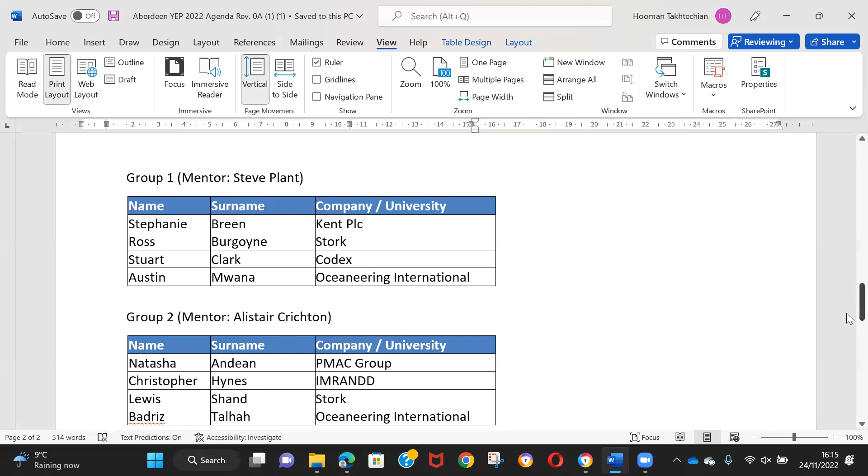Group 4. Okay, so very shortly we will ask Group 1 to stay so that they can kick off their presentation. Just very briefly, I was giving Rebecca a few more minutes.

So the judges tonight are Sue Cushnigan, who is the Maintenance and Integrity Manager at Shell UK in Aberdeen. And we have Chris here, who is with BP, also an integrity lead - senior advisor for corrosion, in Sunbury.

And Rebecca, she's not here yet, but if she does turn up, which I guess is going to be a bit awkward if she doesn't see the first presentation. Should we propose Steve Kane in case? Steve, if you're happy to do that. Wait 2 more minutes, we can - does anybody know where she is? Does anybody contact her? No, I know guys, she might be 2 minutes away, but she also might be an hour away. Yeah, try - have you got the number?

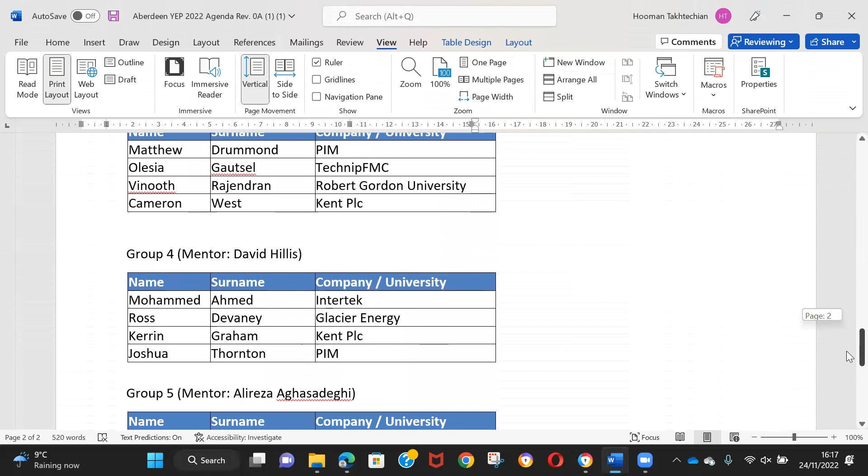Okay, any more clarifications? Everyone happy, knows what they're doing? So it's - was it 1, 3, 5, 6, 2, and 4? Yeah, that's the sequence. You were keeping a track. Oh no, so it was 1, 3 - 1, 3, 5, 6, 2, 4. Yeah.

Thank you, Stephen. Like all good corrosion engineers, you're double hatting tonight. So, in which case, I think if we can therefore ask everyone - Group 1, and obviously mentors are welcome to stay if they want to, up to you. So we don't want - and then at the end, let's just go through. Okay, we can read here.

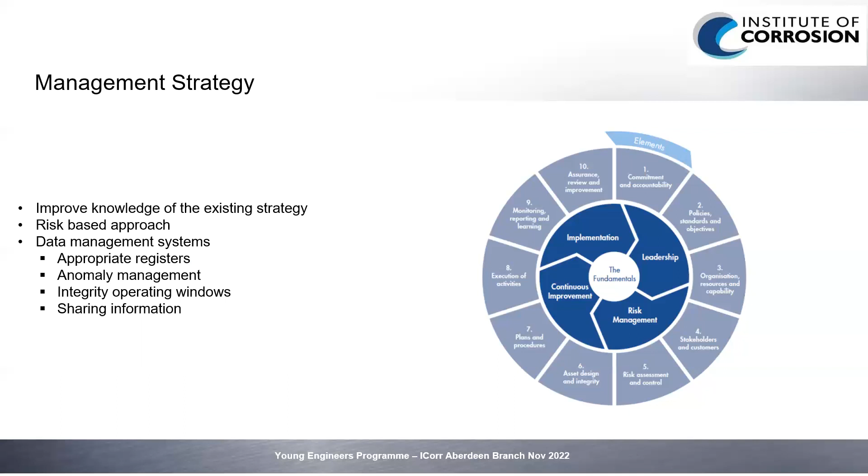The data management systems can also collate when the IOWs are being breached. This not only highlights when they're being breached, but also helps a feedback loop to prevent these breaches in the future. The data management systems aid visualization and data sharing, and this helps decision-making and discussions, not only within the corrosion or IM team, but also with the asset and business management, which will be key in the initial phase of new ownership.

As well as the wider strategy, we wanted to establish if there were any specific corrosion risks on the asset. We reviewed the data to establish different internal and external degradation mechanisms and the probabilities of these occurring. For the consequence, we looked into the impact in terms of safety, production, and the environment. We used this approach for each of the line items on the Excel sheet that was provided. And the results gave the risks, as you can see plotted on the matrix.

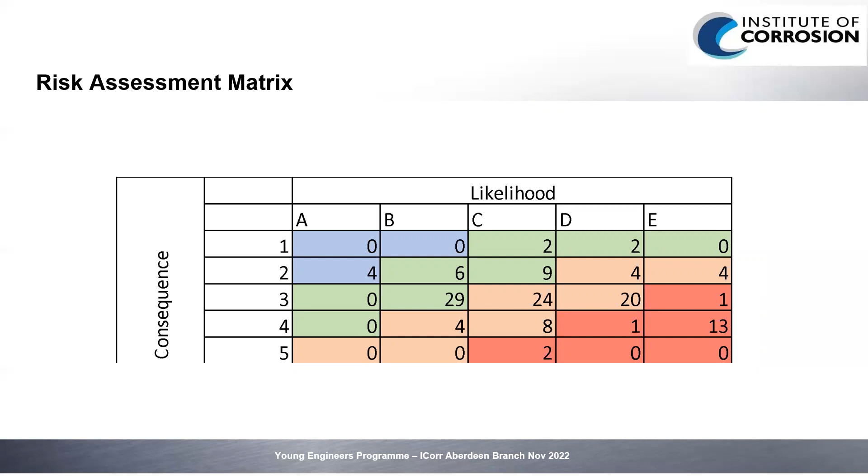There are quite a lot of risks in the bottom right-hand corner. However, there were conservative assumptions taken. Therefore, with additional data, we would expect most, if not all of these, to move within a more tolerable region of the matrix. From the risk assessment, there were 4 key corrosion threats noted in the high and extreme areas of the matrix, with CUI being approximately 50% of these. However, as I mentioned, there were conservative assumptions taken, and this included us assuming there was insulation in place, even when it was an unknown.

As you're aware, CUI management is a significant challenge, with a great deal of time, effort, and money spent across many industries. We would look to work with our process colleagues to establish where there's insulation, what condition it's in, and if there's any insulation that isn't required. We would also look to work with the inspection contractor to ensure the most appropriate techniques are being used during the offshore surveys. Through our processes, our aim is to improve safety, reliability, and efficiencies across our plant, not only the existing plant, but also the new equipment and pipeline for the new field, which I'll pass on to Stuart to discuss further.

Right, thanks very much, Steph.

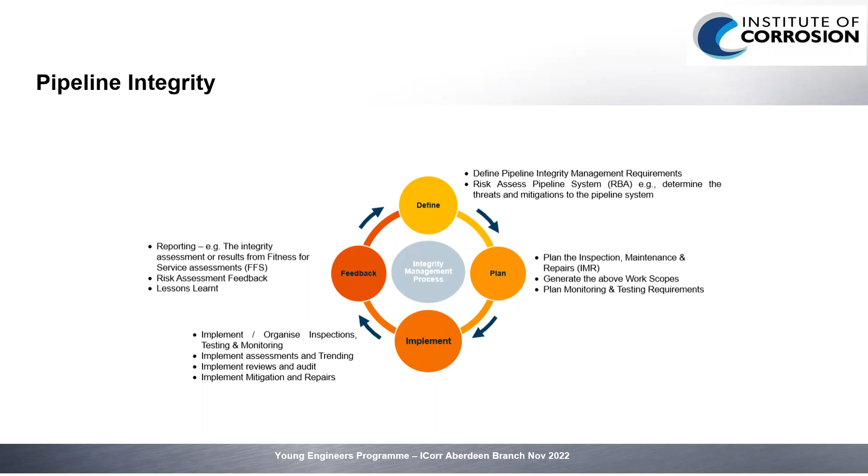So the new reservoir, it's a gas condensate reservoir. We think it's definitely economic to go after. You've got an opportunity there to increase your gas production by about 50%. So quite a considerable increase from where we are currently. We have 100 million cubic feet the platform produces. With a new reservoir, we have an opportunity for 50 million cubic feet extra. Like I say, the reservoir is 10 kilometers away, and studies have suggested that an 8-inch pipeline is going to be the best way to deal with this.

So the main challenges with this new pipeline is, like I say, it's a sour reservoir. So we've got 50 ppm, with our operating pressure, it puts us into the sour service area. So that's going to increase our risk of all the hydrogen damage mechanisms. So hydrogen cracking, stress-oriented hydrogen cracking, sulfide stress cracking, hydrogen embrittlement, blistering, all of that. And because of the local and aggressive nature of some of these, we could end up with a loss of containment, which obviously we have to avoid at all costs, really.

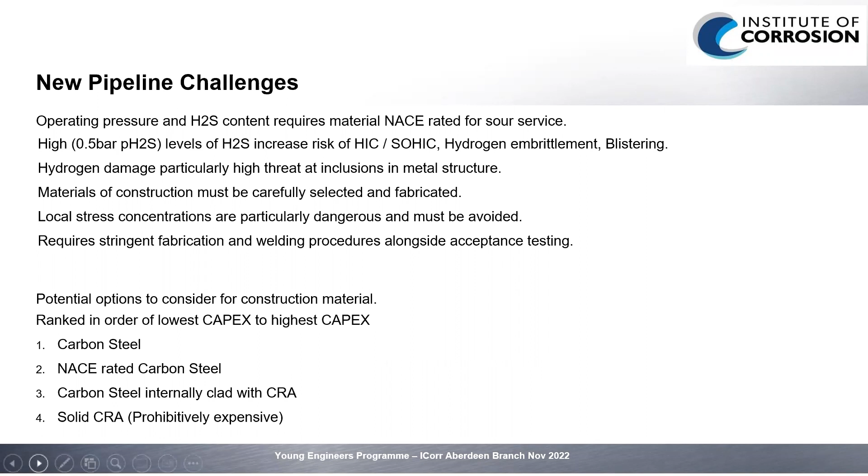And then due to the new field, which is sour, which contains acid gas, your H2S and your CO2, we have done some risk assessment and looked at ways in which this new fluid being tied back into the platform is going to affect or cause any asset degradation. So possible corrosion or integrity risks are your sulfide stress corrosion cracking, hydrogen-induced cracking, top-of-the-line corrosion due to it being a condensate gas. And we basically want to manage this properly to avoid any asset degradation and also to meet export conditions of the export pipeline. So these are some of the risks we've evaluated and we'll try to manage if we work with you guys,

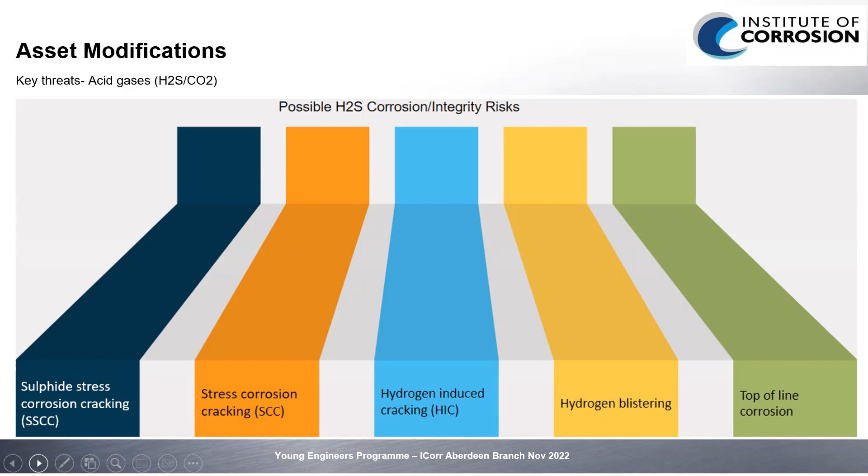the contractor. So we'll move on to the major challenge for us in the sour fluid, which is the H2S, and we'll try to remove this, as I said, to meet export conditions and to avoid any integrity issues of some of this H2S mixing with water and affecting our flow lines or our equipment. So we'll try to remove this, and the process of removing it is gas sweetening.

And we evaluated different factors to come up with the two best methods to remove this H2S or acid gases. So we looked at the H2S concentration, OPEX, CAPEX requirement, because I'm sure it's important to the contractor and operator. We looked at other defined specifications of operating conditions, and we came up with two methods to sweeten our gas: the regenerative one, the amine contactor tower, and also the non-regenerative one, whereby we directly inject our triazine into the flow lines or pipeline. So I'll move on to the next slide where I give you brief descriptions of the two and which is more feasible.

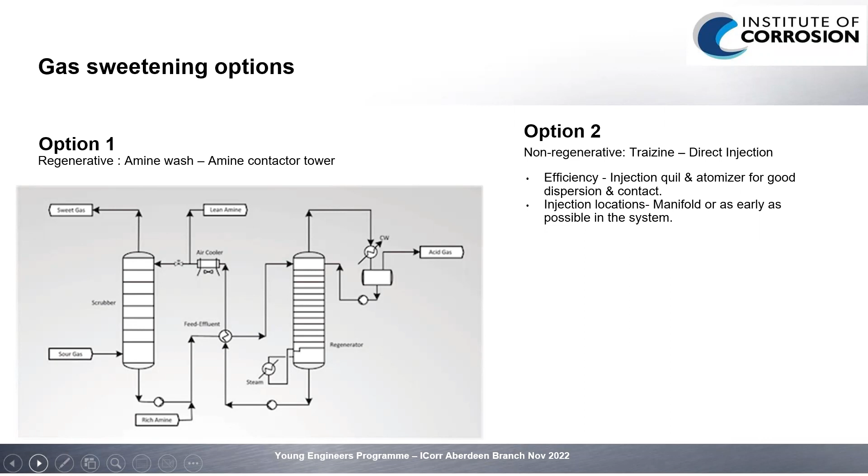The second method basically is the direct injection, whereby you inject your triazine and it removes your H2S or your acid gases from the fluid stream. And for efficiency's sake, we also have an injection quill and atomizer for good contact and making sure that they mix with the fluid. We also look at communication with the chemical company to look at possible locations where we could inject this, could possibly be in the subsea manifold or other areas where we feel might be more effective to sweeten our gas and thereby remove the effect of it damaging equipment or flow lines.

So these are also the advantages and disadvantages, and we looked at, as I said, CapEx and OpEx. They all have their pros and cons and try to fit the operator needs, the client, the contractor needs, and so on. And the main takeaway from this is the contactor tower has a low OpEx because our amine is regenerative, and the CapEx is a lot because you need those massive contactor towers and so on. For the direct injection method, it has a lower CapEx because you just need your pumps and so on. And then it has a high OpEx because you need loads of your triazine because they're not regenerative. So when they are spent, you need to put in new ones. So these are the advantages and disadvantages. Due to time constraints, we can't go into much detail.

And then we also looked at the economics, which I'm sure is important to the contractor and also the client. And from initial assessments, which if we're working with you guys, we'll also look at ways to get a detailed view of, this is just an illustrative view to give you guys an idea of the two processes. And from the look of it, the triazine direct injection method is cheaper compared to the contactor tower one. It's 3 million yearly compared to 4 million yearly. These are just illustrative views, but we'll go into more detail when we have more details and more chemical compositions of the fluid and so on. So that's it for this slide.

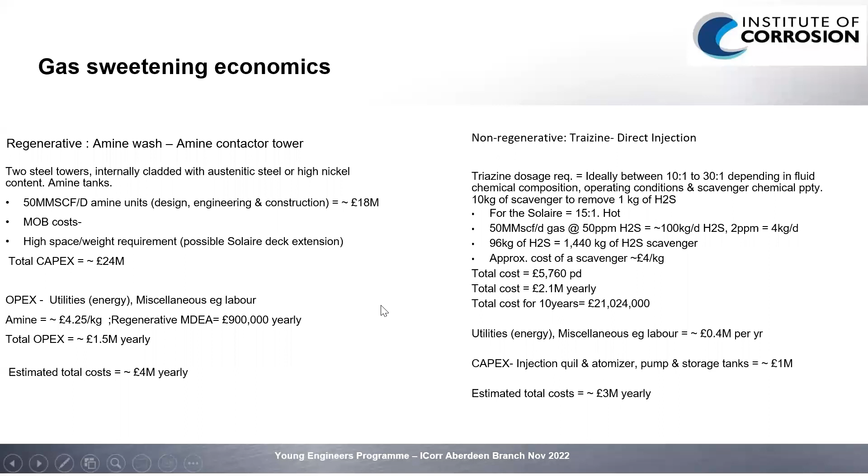To summarize from asset modifications, we recommend the triazine injection method as the best option for the Solaire platform, being an existing facility. Having contactor towers on the Solaire platform brings up issues like space constraints and budget constraints. So we feel the triazine direct injection method will be best for this platform.

Going forward, due to our risk assessment and risk analysis, we also try to ensure material selection, making sure it's NACE rated to NACE MR0175, so there's no asset degradation and all flow lines and equipment are good to go. We also look at fitness for service assessment to make sure they last up to the estimated asset life of 2032 or more, depending on client needs.

We will incorporate all of this operationally, with a systematic approach to IOWs. We will develop strategy management documents for management of change, risk registers, and so on, and make sure we've evaluated where chemical injections have not been optimal, ensuring they are adequate and sufficient.

Due to the condensate gas, we also see there might be hydrate formation, so there may be a need for hydrate inhibitors. These are the strategies we propose, and hopefully when we work with you we'll dive more into detail. I'll pass on to my colleague who will conclude on our deliverable.

Something else we would like to do is look at meeting our net zero goals. You've got four examples there. I'll go into more detail in the next slide.

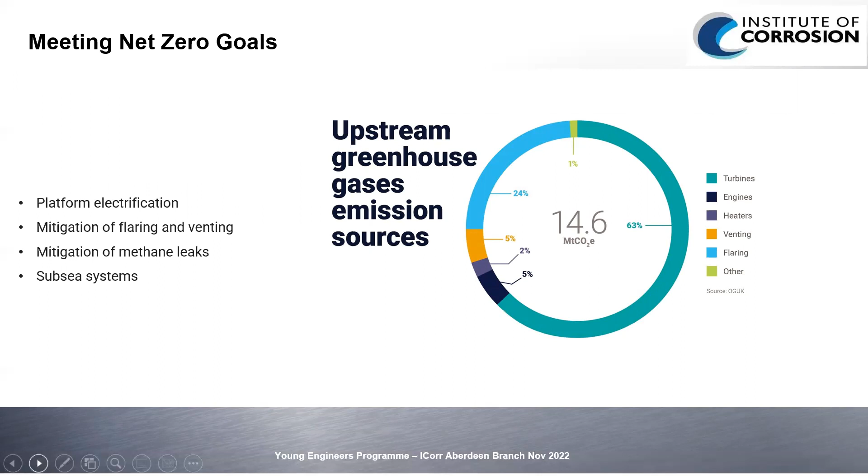To conclude where we are with our proposal, we start with a full initial risk-based inspection just to clear up any assumptions, then integrate this with data management software, which would help relieve any potential risk from change. We would implement these with operational windows, allowing us to work our assets better and more optimally, which leads on to our net zero goal.

With net zero, by having a more efficient plant we will reduce our leaks, including methane leaks, which helps our footprint, but also with fewer inspections we'll be more efficient in that regard. So there'll be a smaller logistical footprint, again helping meet our net zero goal, trying to meet the industry's commitment of 50% by 2030.

Regarding the new field, what we would look to do is a direct injection, using NACE-rated carbon steel in the production of the pipe. But what we'd like to do, if we win the contract, is work with the design contractor to do a full economic study of this before we make our final decision.

Thank you for listening. That is us, and if you have any questions, we'd be happy to answer them.

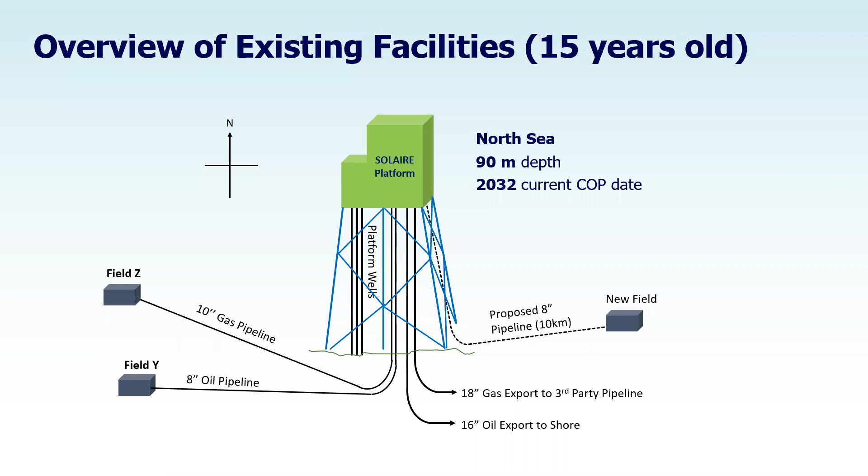So this presentation is about the Solaire platform. The Solaire platform is currently 15 years old. As you can see in the presentation here, you have 2 fields, field Z and field Y. Field Z comes in on a 10-inch gas pipeline, and field Y comes in on an 8-inch oil pipeline. They both run at a depth of 90 meters. And on the export pipelines, you've got the 18-inch gas line and the 16-inch oil line. There's also an opportunity to tie in a new field to this platform.

So the agenda for this presentation: we're going to go through our risk assessment and what we found from that. We're then going to go through our corrosion management program, so our mitigation controls and corrosion controls to manage those risks. And then we'll go through our material selection and our tiebacks, so how we intend to tie in the new fields to the current platform.

So first off, on our risk assessment, we risk assessed all of the pressurized systems within the Solaire platform. This consisted of 108 lines in total.

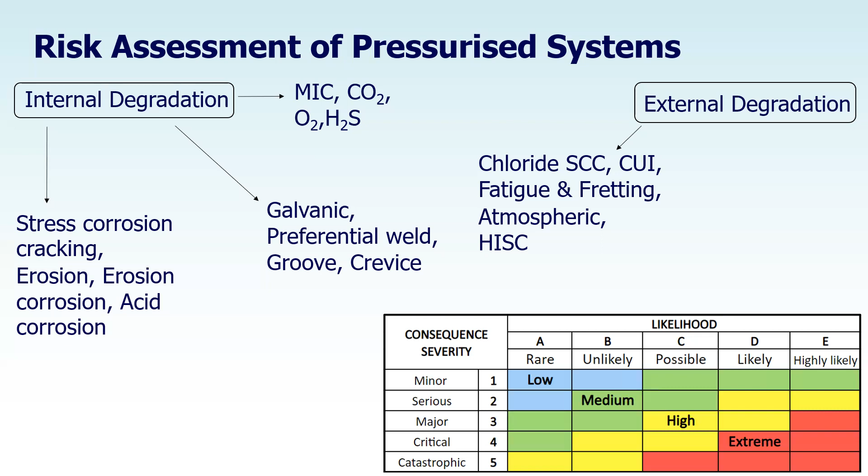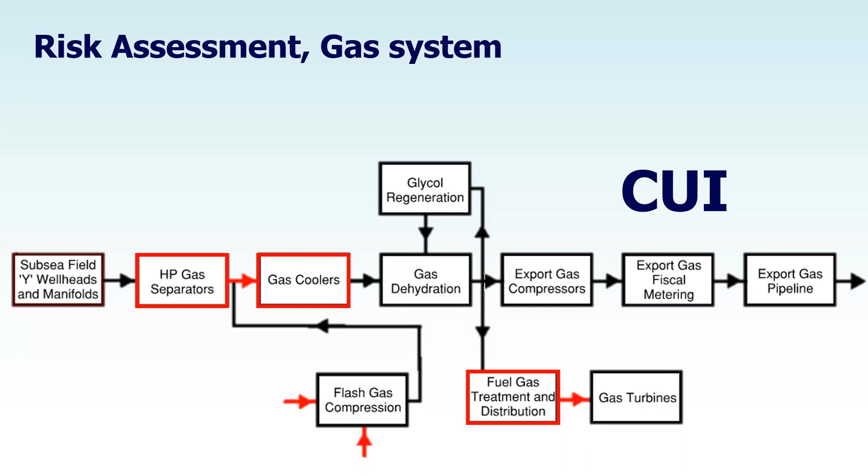Moving on, we have the CUI at these points. Again, you'll see it's only extreme risk that we found here, no high risks.

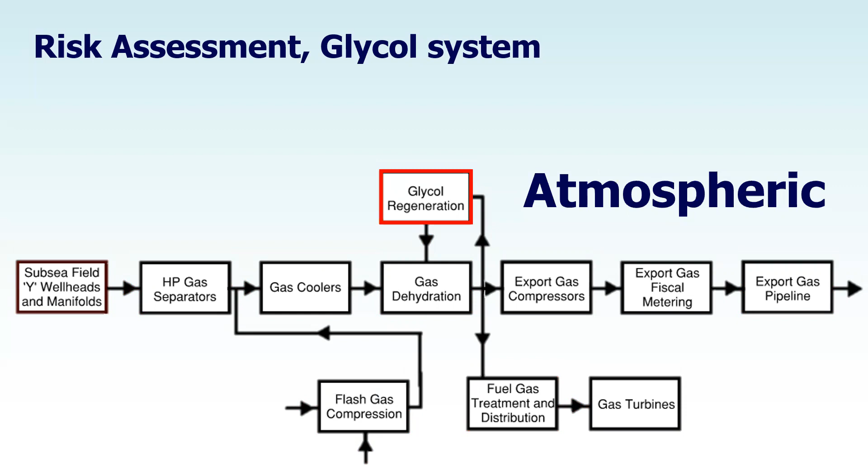Moving on now to the glycol system. We have crevice, CUI, and atmospheric corrosion all prevalent, and there's extreme risk in the glycol regen system. You'll find more detail about that again in the risk assessment in front of you.

Next, we move on to the oil system, so the multi-phase system. You see here, we've got MIC, which is prevalent throughout the entirety of the platform. This is the worst case corrosion within for the whole platform.

We have the export oil pipeline requiring particular attention as it has a history of MIC and other corrosion mechanisms. We also expect to include a dead leg campaign for this particular corrosion type.

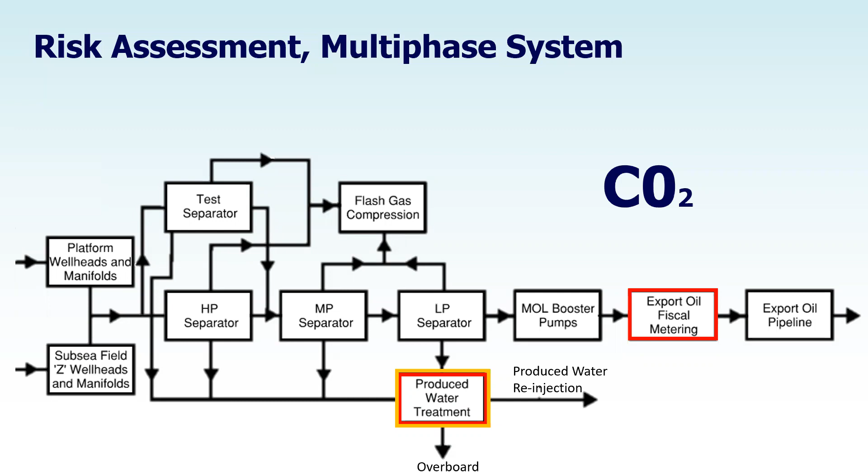Moving on again within the oil system, you have CO2 corrosion at these points. Preferential weld corrosion at these points, yellow boxes again denoting that it's high corrosion, red box is extreme, and in the produced water treatment with other slides again, you've got high and extreme risks both within those sections.

You have erosion here for again the oil system, and erosion corrosion at similar points as a result of that erosion.

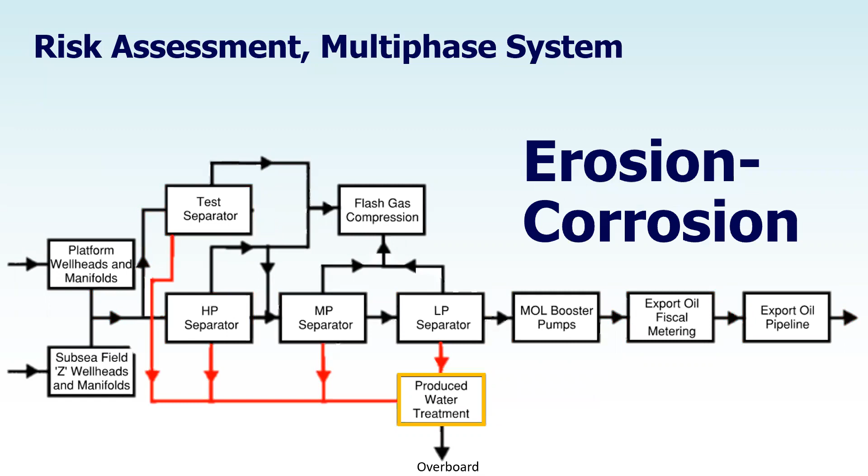This doesn't look that bad, but actually when we went through the risk assessment, we found there were a number of unknowns on the platform, and these would be required to be assessed immediately. Vinuth will cover this in further detail later in the presentation.

Lastly, for the oil system, we have atmospheric corrosion at these points.

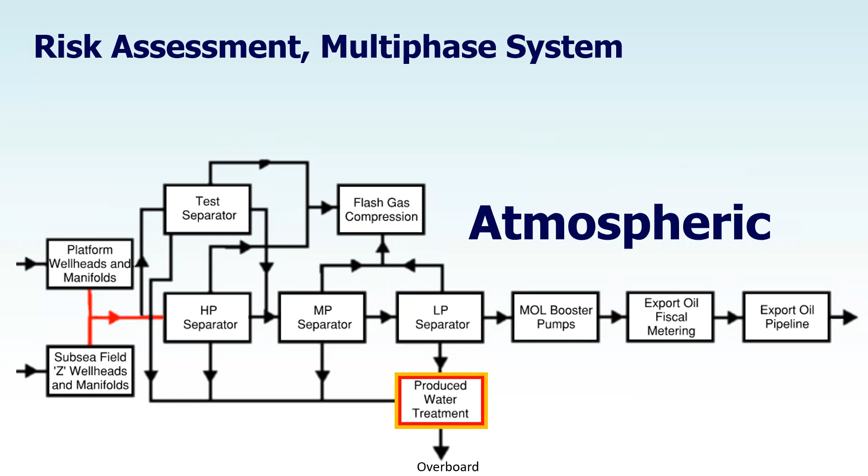Finally, for the risk assessment, we have the miscellaneous systems. These are ones that just we couldn't fit onto the block diagram. We have contaminated water disposal, heating medium, relief systems, all with varying different corrosion mechanisms, and all again for the high and extreme risks only.

So that concludes the risk assessment side of things. I'm now going to hand you over to my colleague Vinuth, who's going to cover the mitigation and corrosion control measures for those risks.

We have made a systematic investigation to identify the potential threats to the offshore platform facility. We identified around 10 corrosion types having high and extreme risk, and 5 corrosion types currently present in the facility. So we made a special strategy for each corrosion type to mitigate and control based on its risk level.

The first one is MIC. Applying biocides will kill the bacteria and mitigate the microbial activities. MIC corrosion is controlled through increasing the pigging frequency and MIC treatment with a different combination of biocides. If we use a single biocide, the bacteria will get immune and it will stay longer.

So PWC and CO2 corrosions are mitigated and controlled with a selection of suitable material with resistance and applying an inhibitor, and maintaining the inhibitor availability.

H2S and oxygen corrosions are mitigated with applying H2S scavengers and oxygen scavengers and controlling the flow rate respectively. Erosion is mitigated by doing sand flushing periodically and selection of suitable material with high resistance.

Galvanic corrosion is mitigated by applying an inhibitor, or otherwise we can separate the two different materials with separating layers such as rubber sheets or a coating.

Crevice corrosion is mitigated where possible by doing the welding and avoiding bolt joints.

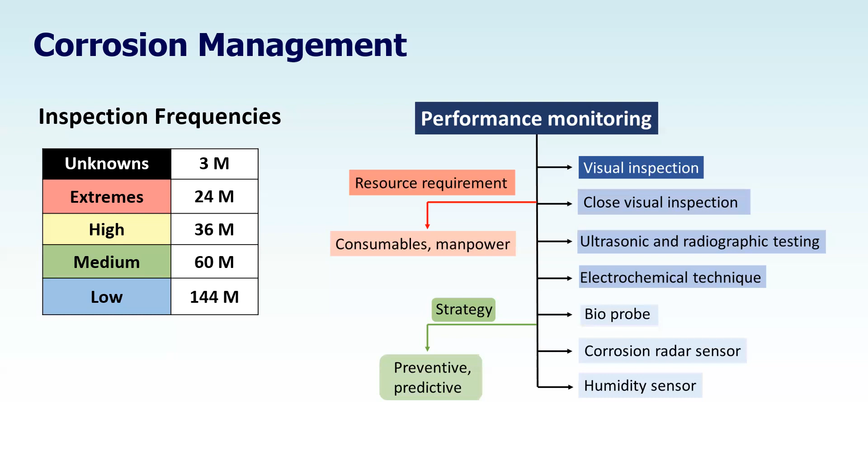As part of the purchase of existing facilities, there is also an opportunity to develop another gas condensate reservoir 10 kilometers from the platform. I'd like to start with a brief introduction of the data we used as input to material selection for the new pipeline.

Two steps have been taken to select the appropriate material. First is corrosion assessment, and second is cost estimate. For the purposes of this presentation, we will only focus on CO2 and H2S corrosion.

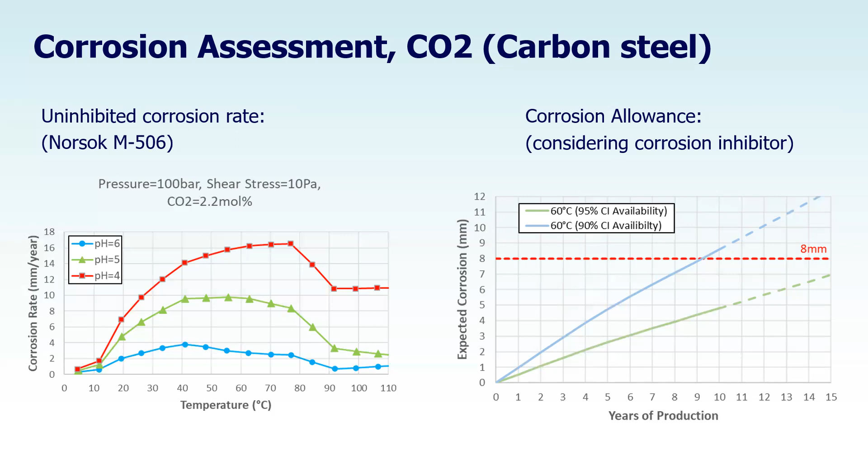That was the corrosion assessment of different material options for the new pipeline. Now I'm going to hand over to Cameron, who will provide more details on material selection and modifications of existing facilities. Cameron. Thank you, Lucia.

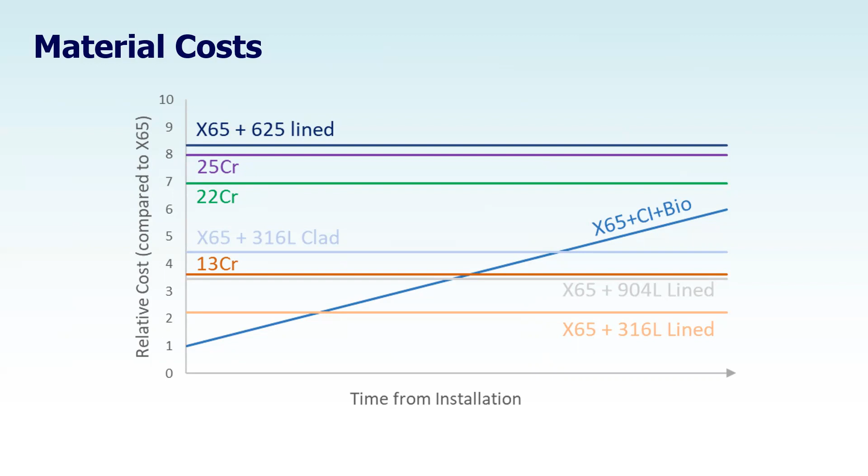Once we've chosen our pipe material, we need to make considerations for welding consumables. In general, the requirement is that we want the mechanical properties to match that of the base material, whilst having a higher yield strength. Specific considerations need to be made for the presence of H2S, as per ISO 15156, to limit or control hardness and nickel content.

Once we've selected an appropriate welding consumable, we'll need to test and qualify that it's compatible with the pipe material. To do so, we do the standard weld procedure qualification trials, including standard mechanical and chemical testing. Further to this, we may be required to do additional hardness, hydrogen-induced cracking, and stress corrosion cracking testing. Further to this, the production welds will be tested with at least 100% UT or radiography.

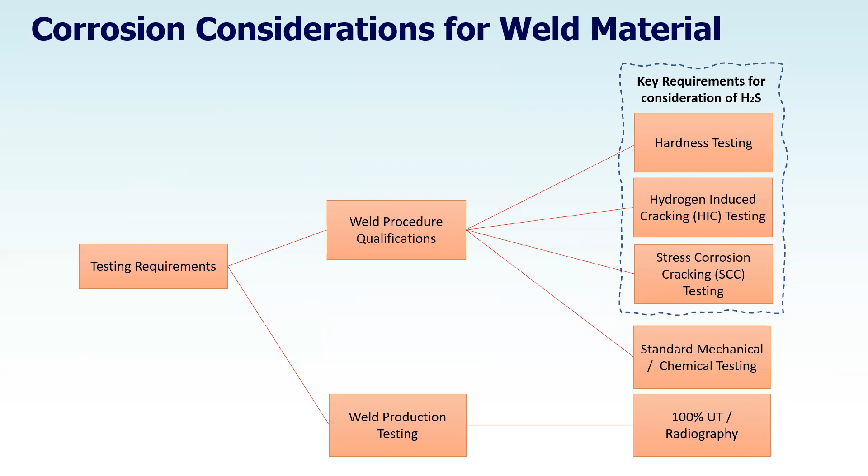Finally, further investigation we've completed in order to assess the tieback opportunity is to assess the compatibility of the fluids coming in from the slightly sour field to the existing facilities on the Solera platform. In doing so, we've determined that there are a number of vessels and components on the platform which are incompatible with the new fluid, specifically including stainless steel clad 316L vessels and components.

Thank you very much, and I'm going to pass back to Matthew to conclude. Thank you, Cameron. So just to summarize, in our presentation we have shown you the high and extreme risks of the Solera platform currently.

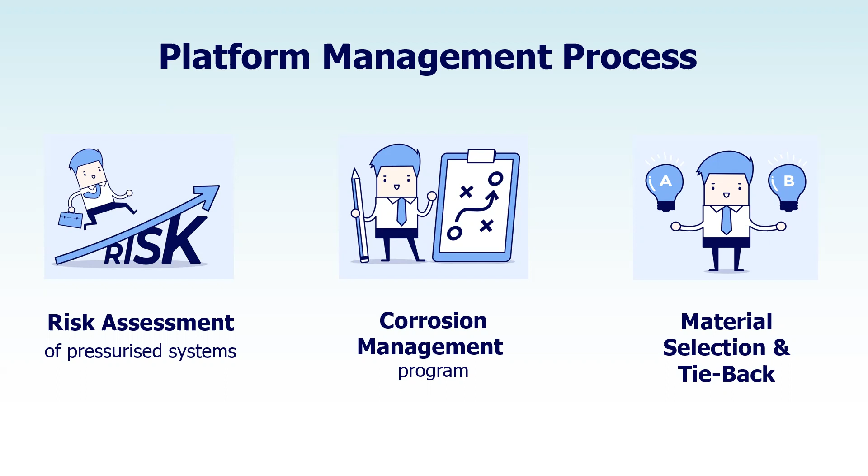Yeah, that's good news. You didn't conclude, so maybe I missed it, but you didn't mention which material you preferred for the pipeline. Yeah, we don't really want to insist on one material because it's always up to the operator to decide, but we show that carbon steel is an okay option, and normally people prefer to go for it. So it really depends on the strategy. If you don't want to invest a lot of money prior to the project, maybe go for carbon steel. If you want to consider overall cost, then other options may come into play.

And if we'd selected carbon steel, you mentioned some online monitoring there, but did you consider any sort of pigging activities we might have to do on that line? Regarding pigging, Cameron, do you want to add something? Yeah, I suppose we'd come from the design assumption that given it's a subsea tieback, regular inspection or clean pigging would be inappropriate, very, very high cost. Yeah, but would we need to do it, do you think, on a carbon steel line? Yes, we would need to do that. Okay. Something to look into, whichever option we select. Okay. Thank you.

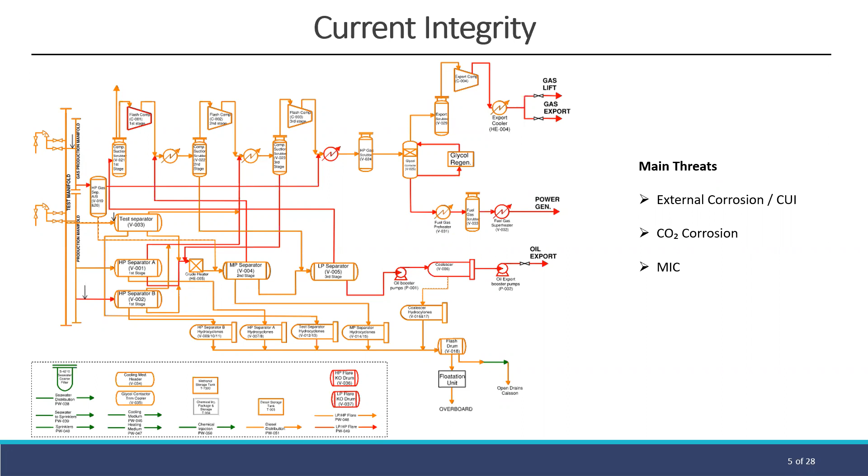The main threats are shown on the right-hand side of the screen. And as you can see here, we've got a lot of orange and red risk. This is primarily due to the known failures and anomalies, the harshness of the North Sea environment, and additionally an applied level of conservatism, which has inflated the risk overall.

So starting with the outside in, our main external threat is corrosion under insulation. 25% of the items on the platform are unknown whether they are insulated or not. We recommend doing a line walk to get the insulation status reported and the condition of these unknown items.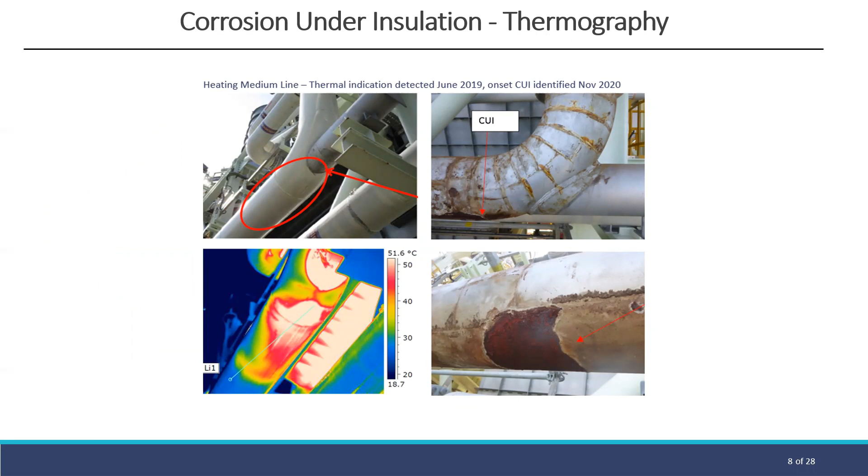So we have high and medium risk items due this year for insulation removal. So what we recommend is thermography as a CUI screening tool initially to detect water ingress and help prioritize insulation removal. Here's a real life example of a success story where thermography is being used, with a thermal image shown on the bottom there. And then a year later, when insulation was removed, CUI was detected.

So, internal risks. CO2 corrosion has been noted on both oil and gas systems. Both oil and gas pipelines are inhibited. However, there's been note of failure and downtime of the gas inhibitor pump, which has had significant downtime thus far and has reduced inhibition of this stream. We recommend inhibition of the separators to ensure carryover throughout the rest of the stream. Additionally, a review of the inhibitor to ensure it's water soluble is recommended. The corrosion rates are most prevalent at separation and diminish downstream.

And moving on to the export system, what we recommend is dew point monitoring, and where there are prolonged periods of excursions, potentially insulating these items. Now, I know what you're thinking, mitigating against CO2 and introducing the potential of CUI. However, this would be managed through the CUI strategy.

Next, we have MIC. This is prevalent in primary separation, produced water, and the oil export streams. Raw seawater has been used to flush the separators, which is an accelerated route of introducing bacteria within the system. So we recommend treating this seawater before flushing, or even better, utilizing thermography to detect solids within the separators and only flushing with treated seawater when absolutely necessary. We recommend a biocide kill dose followed up by routine biociding and sampling to ensure effectiveness.

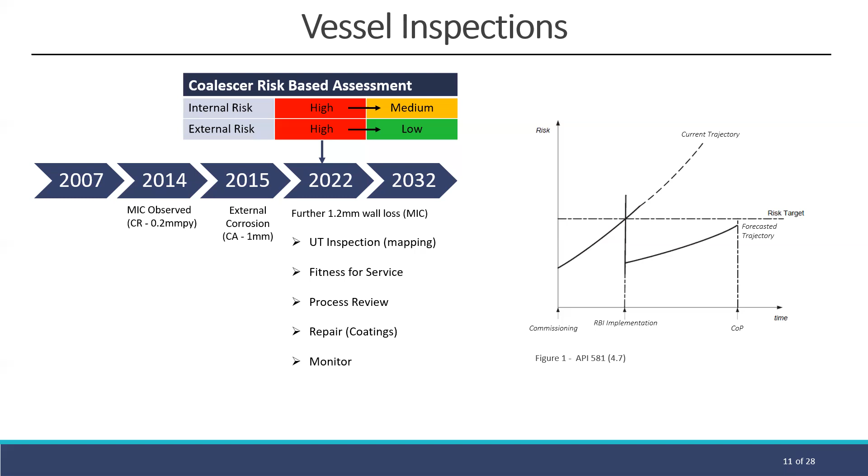So the written scheme of examination looks something like UT mapping to gain the remaining wall thickness, a fitness for service assessment, potentially a process review looking to downrate this vessel to allow repairs focusing on external first, and then an intrusive inspection to repair the glass flake lining when the shutdown permits. And then we would monitor this throughout life.

As Rosie mentioned earlier, we've noted MIC and microbial activity upstream, so we suspect they're MIC, especially as we know corrosion inhibition has been good in life for this pipeline. So the first thing we'd recommend is doing a more detailed defect assessment on these to tell you how far you can actually operate to with wall thickness.

The main thing we're noting right now is that it's probably very unlikely this pipeline will be able to operate all the way to 2032 based on its wall thickness. So our immediate mitigations would be implementing a monthly pigging regime, reducing the water content from 2% right now to ideally 0.5%, but 1% may be more manageable, and also introducing biocide into the oil export system.

What we'd recommend doing is a temporary bypass utilizing a hot tap. This will allow us to replace that 2-kilometer section with vessel intervention, allowing us to maintain export around the bypass line while doing the replacement, reducing the impact on shutdown. This also has the good impact of reducing the cleaning and pigging requirements prior to the replacement, reducing the impact on the onshore and offshore facilities.

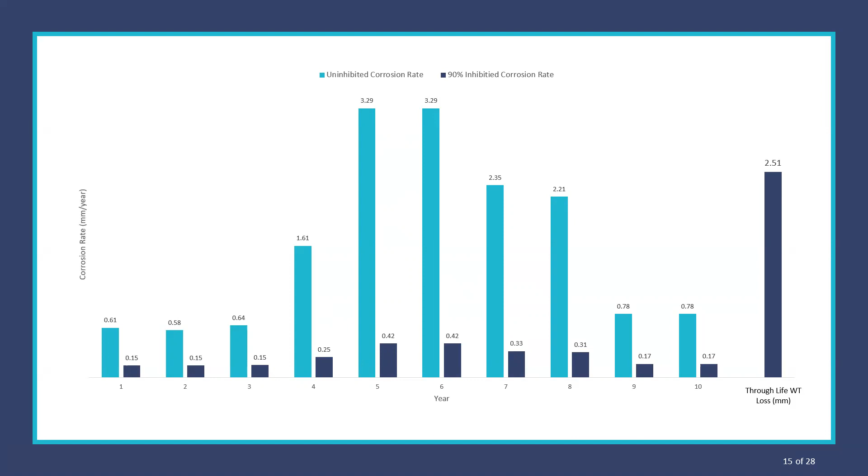Next I'll talk you through our approach to the new subsea tieback design. We were asked here to look at material selection, welding consumables, and also corrosion mitigation. So we performed quite a conservative corrosion assessment, and what we found is we can reduce the through-life wall thickness loss to 2.5 millimeters using inhibitor, telling us that carbon steel is the feasible material, and that's what we're going to use.

Looking a bit further into the material grade selection, we're in ISO 15156 region 1, which allows us to choose a very high number of carbon steel grades. We've chosen API 5L X65 due to the lower wall thickness requirements and the cheaper material requirements later on. We verified this with wall thickness calculations.

We're also choosing a CRA spool at the inlet. This will help allow for corrosion inhibitor mixing and also reduce the worst-case corrosion rates at the inlet. Because we've got high temperature, high chlorides, and some H2S, we can't choose things like 316L. We did think about looking at a solid duplex, however, requirements for external corrosion protection and cathodic protection meant we decided not to do that because of the cracking risk. So we've chosen Inconel 625 because the spool is only going to be of short length.

For welding consumables, we've been to specific manufacturers and suppliers, and we picked out two consumables we think would be perfect, both carbon steel and Inconel 625, if welding is required.

Looking at mitigation of the internal corrosion, again we've proven inhibitors feasible, so we'd choose that for internal corrosion mitigation. We would have that CRA spool at the inlet, and we'd also install an umbilical to allow for further chemical injection as required through life, for things like biocides and scavengers as needed.

For external corrosion, we've done cathodic protection calculations to DNV and ISO standards. What this told us is we need 34 aluminium bracelet anodes on the whole pipeline to protect for corrosion through life. We've also chosen 3LPP coating because it's got very good coating breakdown factors and is widely used in the North Sea, and we've chosen 2.8 millimeters of thickness based on ISO standards.

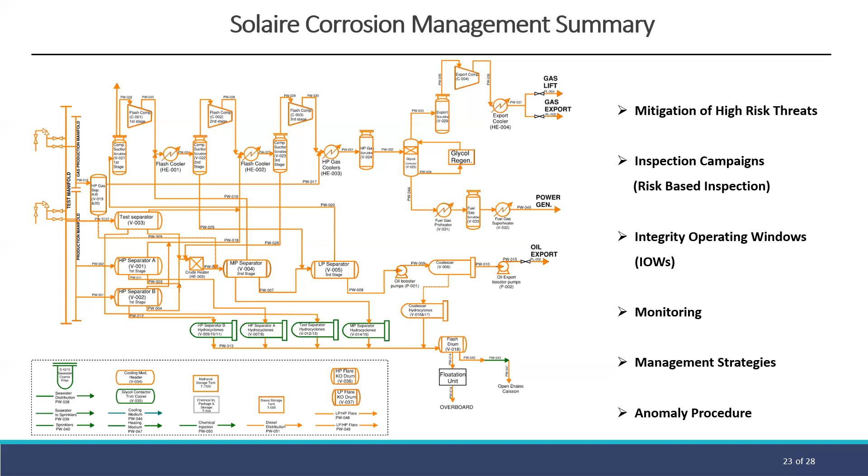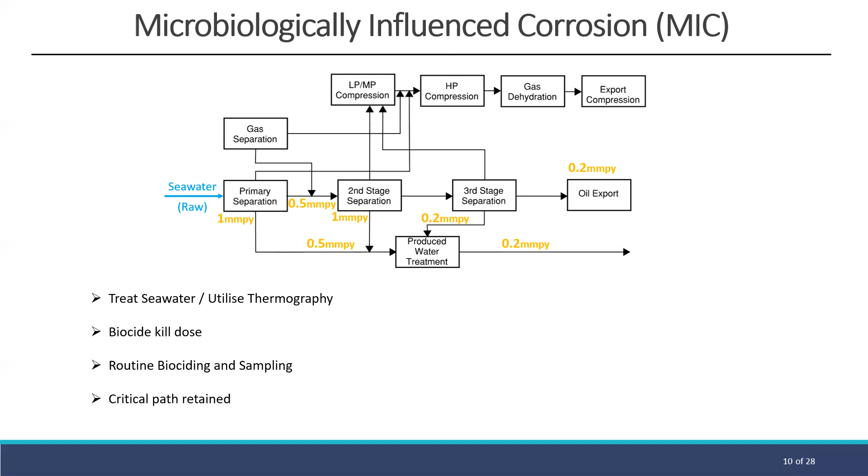But part of the reason we inputted the ABEX accrual into our cost model is we wanted to build up almost like a fund, with decommissioning in mind, but not being closed-minded to that - building up a fund that can be used for alternative options, i.e. carbon capture options. But yeah, that's definitely something that can be looked at. The model was based on expecting the revenue to drop with reduction in production, but also expecting the operational costs to remain very similar throughout the life cycle.

As technology advances, efficiencies advance, and the operator becomes more efficient within the sector - we've been quite conservative with the operating costs, we've gone on the high side knowing the client is new to the asset. We're not expecting them to be like an established operator with a lot of synergies that can really get their cost per barrel down. So we've been very conservative, and I think there's definitely scope that this could go beyond the year 10 life cycle.

We started off with the scope of work provided by Bala Integrity by creating a PFD based on the process conditions given. Here we've highlighted all the anomaly observations provided by the contractor, and we can see several anomalies across all different utilities. We then put this into a table to categorise it into different sections, giving a starting point for our risk assessment.

So Shravan will take you through the risk assessment that we've done as a group.

Thanks, Aileen. So after developing our diagram, we have done a qualitative risk assessment for all the equipment. Here is the matrix — based on our qualitative risk assessment, we've classified equipment into 4 different classes: low, medium, high, and extreme. For that, we need the likelihood and consequence severity.

For the likelihood, what we've done is based on our anomaly information, categorizing it from rare to highly likely. If there's no information available, we use the material and the fluid going through it, along with the temperature and conditions, whether there's a coating or insulation or not, and based on our experience and literature, we determine whether the likelihood is rare or highly likely.

Regarding the consequence of failure, we have chosen failure consequence based on safety — personnel working near the equipment — and otherwise any disruption of production, which leads to cost and environmental impact. What we've done is take a more conservative approach: if the consequence of failure is higher for a particular classification, we use the higher one.

So based on that, for example, if the consequence of severity is 4 and the likelihood is D, then it comes under the extreme condition. If that is the case, it has to be attended to straightforward — either the likelihood has to be reduced, or the consequence of severity, and ideally both.

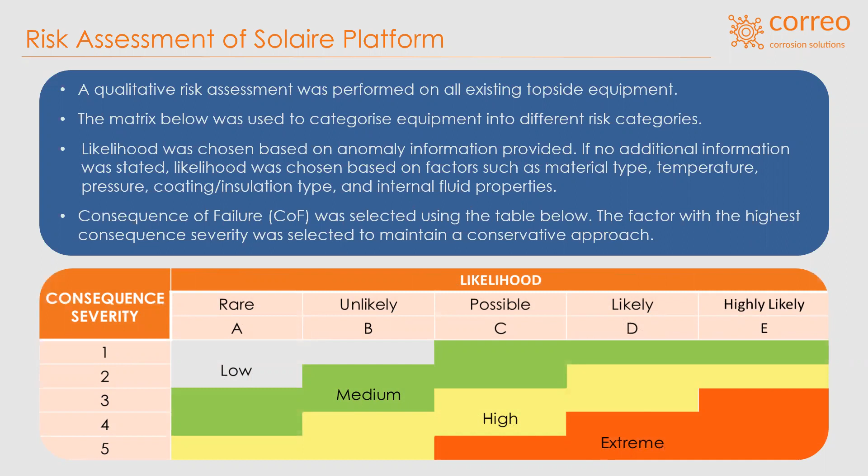What we've observed is that over 80% of the topside facilities are in the extreme and high category, which is not acceptable. And this is based on the current inspection techniques currently being performed.

So what are the shortcomings? They use time-based inspection, which is not right when you are looking into an extreme facility versus a low facility, wasting a lot of time and spending cost in low-risk category equipment. We also observed poor administration of the inspection database, and a lack of inspection for much of the equipment.

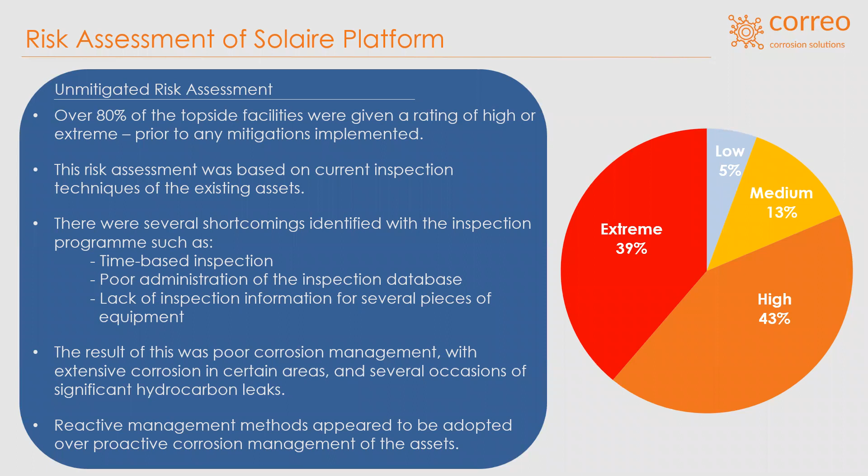The result of this is poor corrosion management, more corrosion in certain areas, and significant leaks in the hydrocarbons. There's a reactive management method in place, and we are looking into more proactive corrosion management of the assets. With this, I'll forward to Aileen, who will go through the corrosion management things.

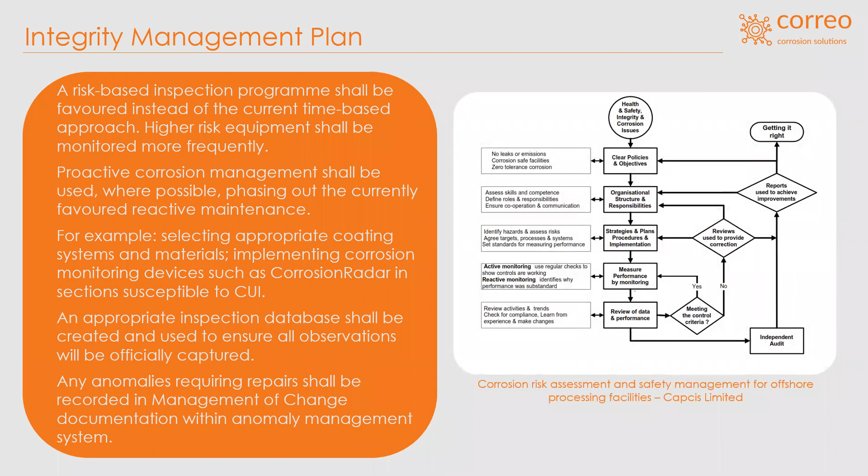So again, this is just to show that we are following the HSE loop here, the diagram, which I've explained in a more simplified way previously.

Going back to the example of the produced water system in place, this is again the unmitigated risks here. As you can see from the mitigations we are suggesting, such as inhibitor injection, ultrasonic testing, inspection and maintenance of the coating systems with corrosion probes and microbial sampling, we have then decreased the likelihood of...

...these events occurring. As you can see, we haven't actually decreased the severity of any of these, as nothing has particularly changed, such as materials or anything, but more so with the inspection techniques we are choosing at a more frequent rate, our likelihood should hopefully decrease, bringing them into lower categories.

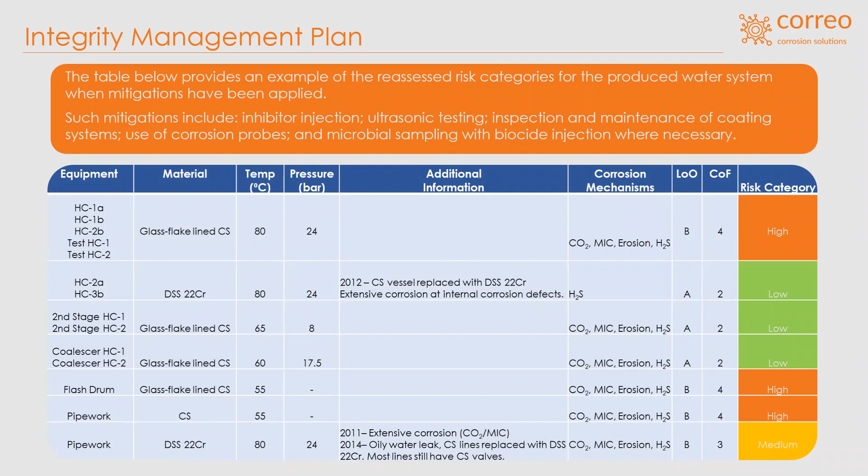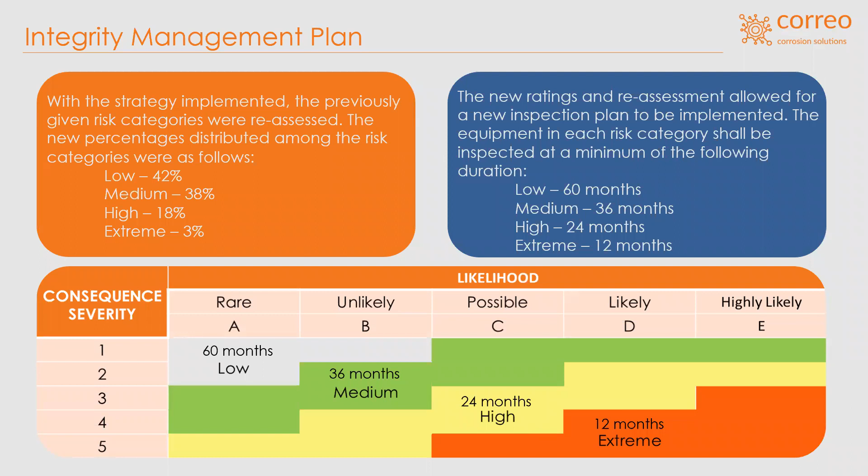So as part of the scope given to us by BALA Integrity, we were also given this new gas condensate subsea tieback. We've produced a diagram here for illustrative purposes only, so we can see our new gas condensate line, our existing infrastructure, as well as our export from the Solaire platform. We were given the data that there would be 50 parts per million H2S, as well as 2.2% CO2 content. With this, we calculated partial pressures of 1.225 and 539 kilopascals of H2S and CO2 respectively, based on the design pressure of 245 bar.

When we add these together using ISO 15156, we came up with a pH of 3.7, which landed us in sour region 2, meaning this would be medium sour, and we would then have to assess this for our material selection. The partial pressure ratio of CO2 to H2S was 440 to 1, which meant that it was in the mixed corrosion regime, but predominantly CO2.

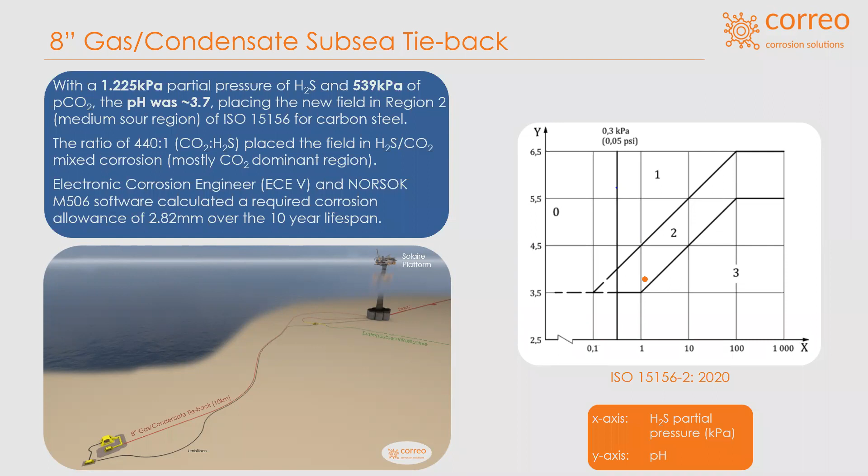We also calculated an inhibited rate using NORSOK M001 to give us a corrosion allowance of 1.18. Because we had a relatively low corrosion allowance, we could select a seamless X65 carbon steel sour grade material for our line pipe. And we had to be wary of the potential corrosion types that we would face, such as CO2, H2S, top of line, bottom of line, microbial induced corrosion, erosion, and preferential weld corrosion.

We've got measures in place to mitigate against these, such as the injection of corrosion inhibitor, scale inhibitor, and MEG to prevent hydrates into the field periodically when required, when we have more information to set up a regime on this. We'll also be making sure that the weld consumables are compatible with the material that we have selected, and ensure that they are also sour grade.

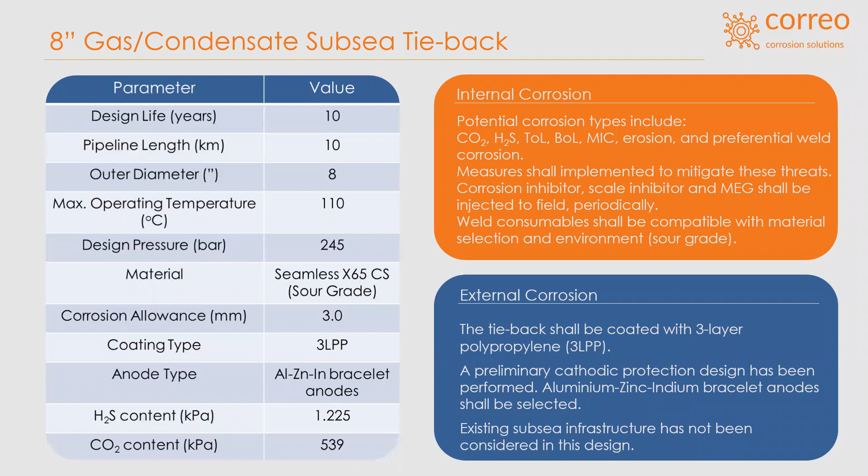Because we are now injecting a slightly sour line into our topside facilities, we had to perform a sour service assessment of the platform facilities, which Craig will take you through now.

So, sour service, obviously the presence of H2S. This is just our original PFD. Here you can see we have the new field inlet and we have the processing there. For sour service, you would expect things along the lines of hydrogen-induced cracking, stress corrosion cracking, acid corrosion, and microbial. With that in mind, this would be similar to CO2.

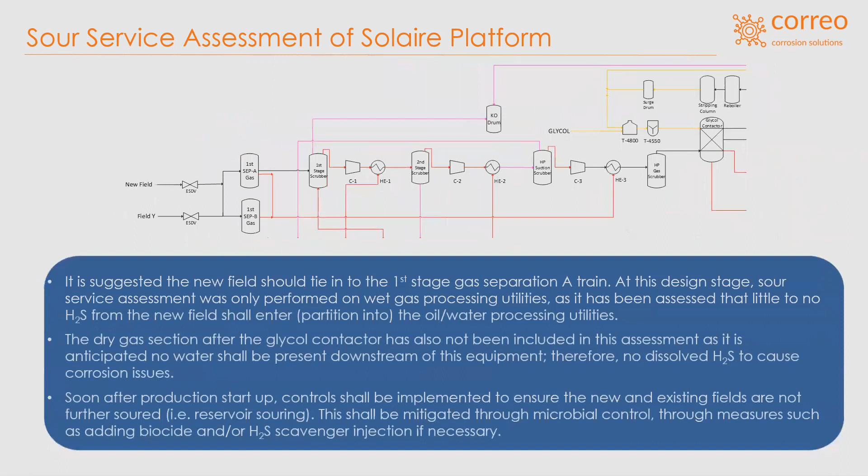For our material selection, we were using NACE MR0175 and ISO 15156 for corrosion resistant grade steels. We'd also have to consider corrosion resistant grade fittings and fixtures, washers and the like.

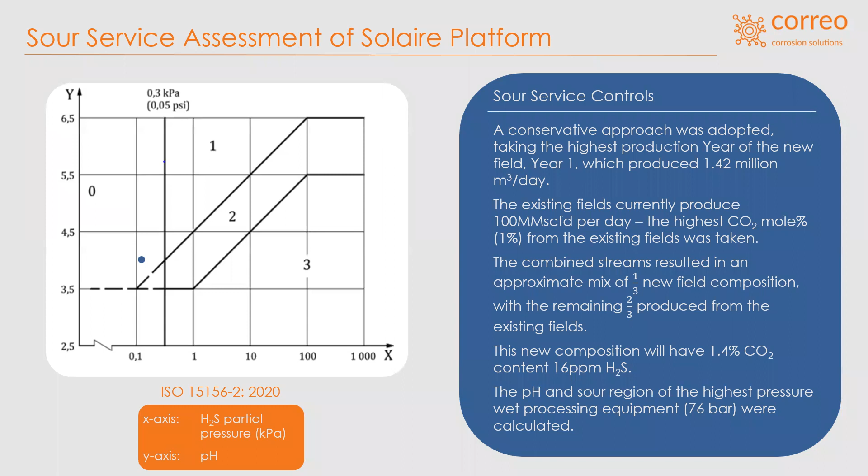So this is our summary. So the unmitigated risk assessment and currently implemented time-based assessment located almost 80% of the equipment in the high and extreme. And after our integrity management plan using a risk-based inspection methodology and being more proactive, corrosion management is adapted rather than reactive methods, and it decreased the risk, high and extreme, from almost 80% to less than 20%.

So for the new tieback, the new field is in sour region 2 based on ISO 15156, and we have a few recommendations here: having a seamless X65 carbon steel sour grade and 3 mm corrosion allowance selected, and we need to have compatible weld consumables. And the coating selected is 3LPP. And regarding the bracelets, aluminum-zinc-indium anodes need to be selected. And corrosion inhibitors and MEG are recommended.

And the assessment regarding the already existing one. So what we have observed is that the commingled gas inlet had a CO2 of 1.4% and H2S of 16 ppm. So the assessment revealed that they are suitable for processing the new field conditions. However, we are capable to do more sour assessment.

And finally, what we would like to say is we are a capable and also passionate and professional team, with a diverse background, and with the sole aim of developing and designing a corrosion management program to decrease the cost and ensure successful running of the plant for the industries. And we look forward to working with you. Thank you.

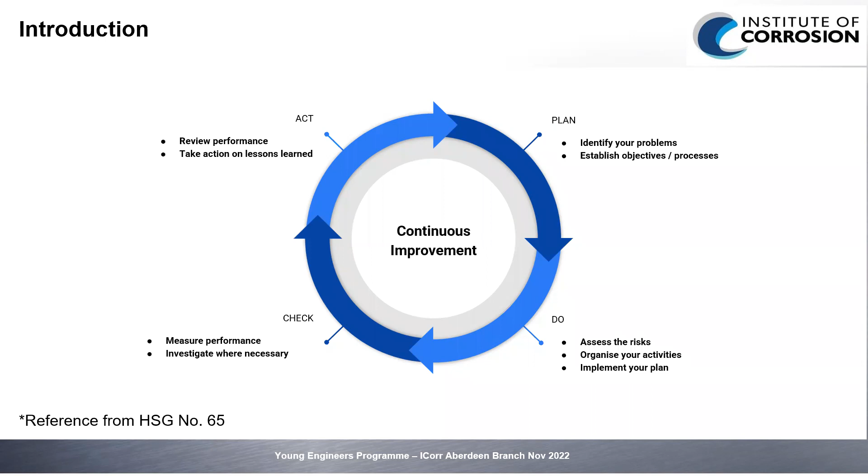Externally, we've got the threats of chloride pitting, stress corrosion cracking, atmospheric corrosion, galvanic corrosion, and CUI, which is a bit of a theme across the asset, which Chris is going to go into more detail on later. So how are we going to manage these threats?

Referring to DNV G101, we've identified inspection activities both internally and externally to start with our inspection plan. Internally, in terms of preferential weld corrosion, we believe installation of continuous UT monitoring probes would help here, along with inspection activities on the hot spots such as UT, RT, phased array, and long range UT.

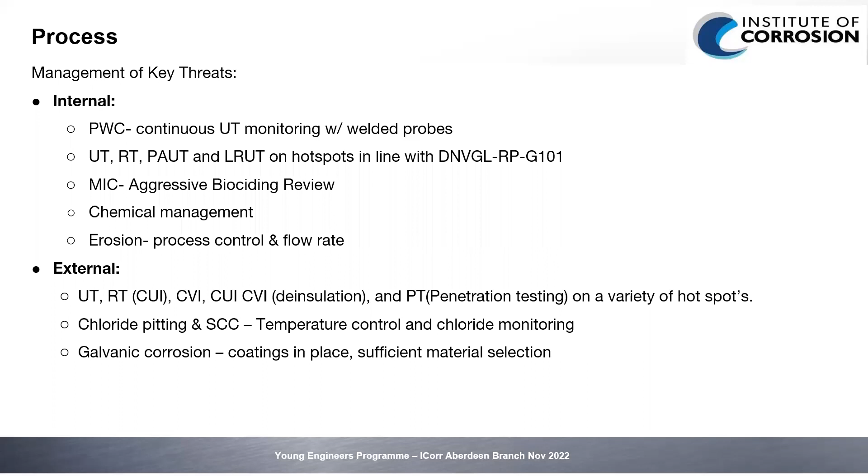And also for the stress corrosion cracking, we believe some chloride monitoring is required. In terms of the galvanic corrosion, we believe inspection of the current coatings in place and to determine if there's sufficient material selection right now.

Moving on to the utilities, our risk assessment has noted approximately 50% of the equipment categorized as high to extreme. Once again, a lack of inspection data has forced us to be more conservative with our RBA. Once additional data has been gathered, this will be updated and reviewed as per the Plan, Do, Check, Act cycle.

In addition, some lower risk equipment could be potential candidates for event-driven inspection once confidence has been gained, which we feel can add real value.

In terms of main threats, internally, we're seeing a continued MIC presence throughout the utility system as well as the process. We've also got the potential for acid corrosion within the glycol system.

There was a glycol leak in 2020. At the time, this was attributed to CUI. Based on the fluid and the rich glycol pipework, acid corrosion is expected. However, inspection data in this area is limited.

We also have the threat of O2 corrosion, most notably in heating and cooling mediums. Once again, this is expected based on the fluid. Again, inspection data has been sparse in this area.

Externally, we're looking at pitting and cracking presence throughout the CRA locations, with several instances where the operating temperature is on or above the pitting and cracking thresholds for these materials.

As previously stated by Lewis, CUI is a massive issue on this asset, which I'm going to cover in just a bit. And finally, a general external threat similar to the process side. So how do we plan to manage these?

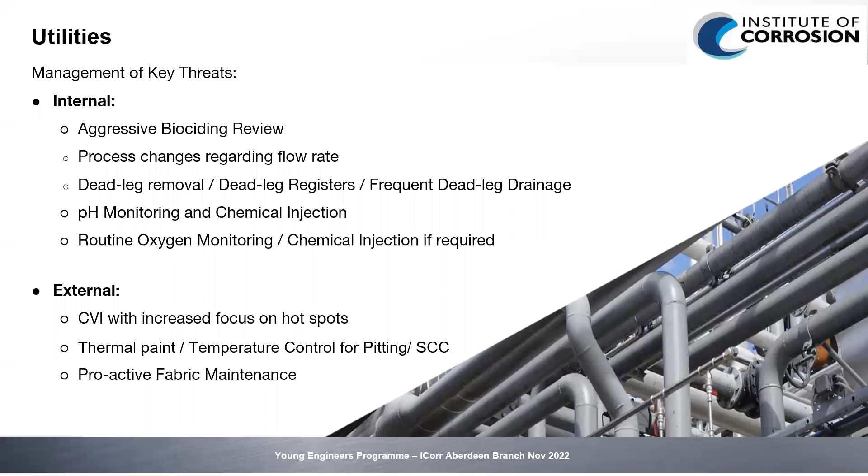If you do not know the status of your insulation, you cannot possibly identify CUI as a threat. This problem is compounded further when you look at it by system.

Again, high risk, but with 40% of your system known as a blind spot. Incidentally, this is also the system where in 2021 there was a 70 kilo gas leak which resulted in the platform shutdown, and CUI was noted as the cause at the time. It's also worth pointing out that the current insulation status of that pipework that failed is unknown.

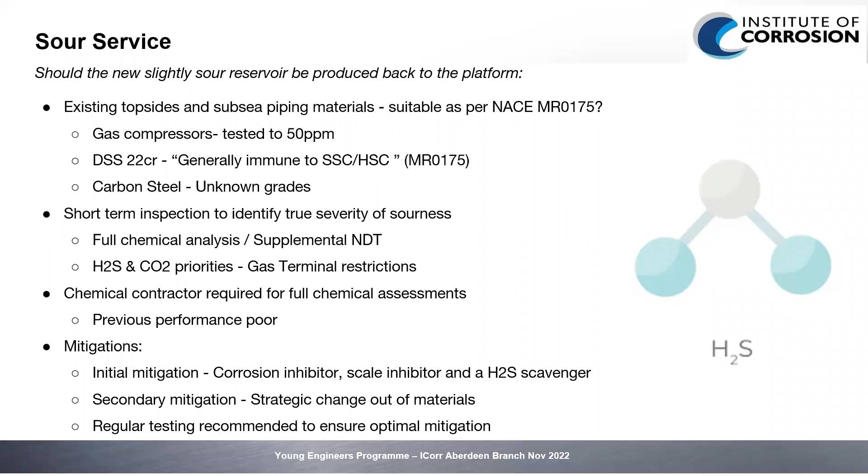So should we tie in the new reservoir? What would we recommend for the pipeline? It's essential we pick the right material, but we also feel low cost would be a key driver for yourselves and your client.

For welding materials we would use carbon steel welds, but these undergoing hardness surveys to understand if they're at the correct hardness levels and are more resilient to the risks. And we recommend low percentage hydrogen consumables are used to prevent introducing further hydrogen into the system.

So the main benefit of these materials is a lower cost, and they are mostly resilient to any of the threats coming in. There are other exceptional materials such as DSS 22CR, but with this being a more expensive price point, we believe carbon steel is the best choice for this.

Hand over to Chris. So one of the steps in carrying out threat assessment is to identify possible damage mechanisms through the RBA process, and this flow diagram further illustrates the credible damage mechanisms identified on the oil system.

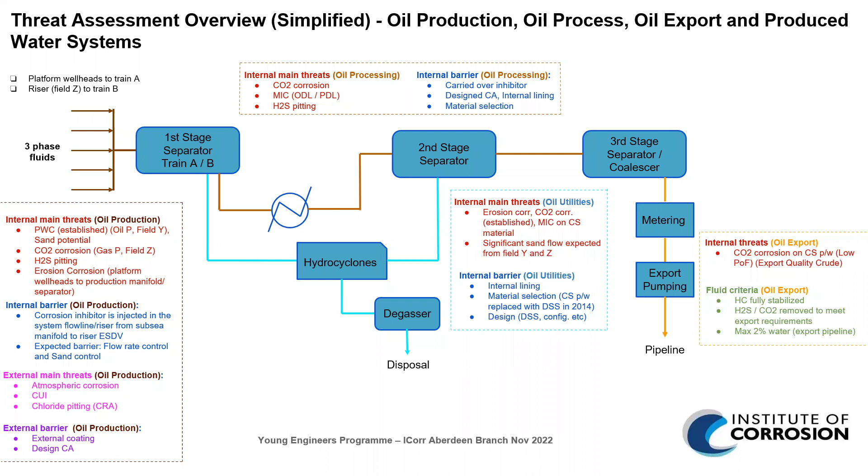Here's another example where we take into account material selection for the produced water system, where almost 80% of the components were constructed either from duplex stainless steel or carbon steel with glass flake.

And here is the top threat identified on the gas system, further to the gas dehydration process, where it is expected to be dry gas before being exported through the pipeline.

And another example where you consider the threats on the glycol system and the operational barriers.

So once we get the task count, then we can estimate the duration using the inspection norms, and then from there we could estimate what the total inspection hours are.

And this is the 12-year look-ahead plan for all the RBI plans established for the facility's medium and low criticality items, where we plan to inspect from the second year onwards.

So all very high and high criticality items are planned to be inspected during the first year using NDE or IVI during turnaround or at the earliest available opportunity, and all the medium and low criticality items from the second year onwards.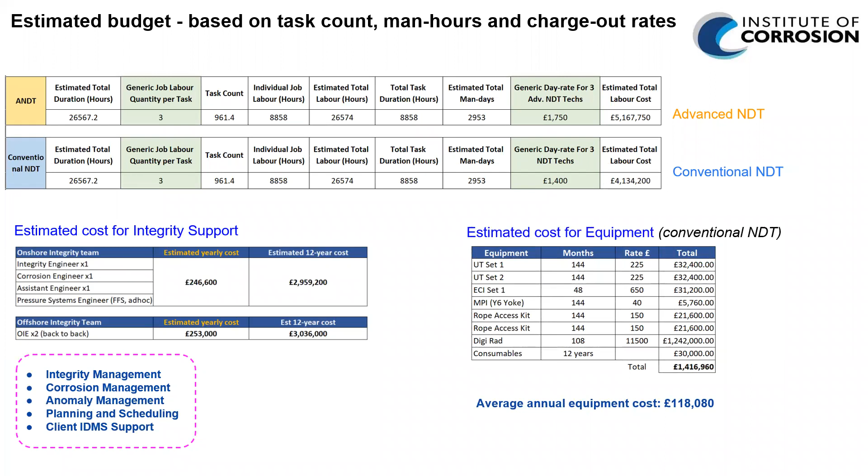So based on the estimated cost on the previous slide, we can now see what the total cost would be like. The annual cost would be somewhere around 966,000 pounds per year, and around 11.6 million pounds for the 12-year period.

If we factor in the 2% inflation rate every year, we would be looking at a cost around 13 million pounds for the 12-year period, averaging about 1.08 million per year.

Please note that RBI is a dynamic process, meaning it could change based on new information received, so this table and estimate should be used as guidelines.

And then we move on to the corrosion control matrices developed for this facility. As an example, this table below represents a snapshot of the master CCM developed by our team. As you can see, the table covers the management of corrosion through chemical, design control, and operational control, and also the target parameters for chemical management.

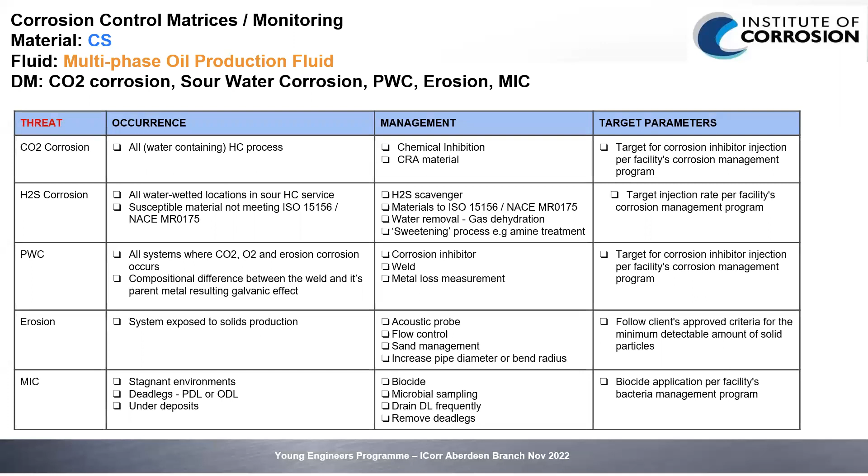And this brings us to the last question, and the most important one: why us? We understand the challenges and issues faced by the upstream oil and gas industry, and our team brings new ideas and measures for your asset. We use a consistent and robust approach, and most importantly, remain compliant.

We're determined to challenge the status quo, while at the same time offering alternatives which are digitally supported and cost effective. With a good integrity plan implemented, not only will we be more efficient, we can eliminate major incidents and reduce the amount of fuels and emissions, which will contribute towards the UK oil and gas net zero targets.

That's why, ladies and gentlemen, we feel we are the best choice for your client's asset integrity and corrosion management provider. Thank you for listening today. Do you have any questions for us?

So hello, I have a question around your selection of carbon steel for the new pipeline. How did you assess that? How did you go about deciding that carbon steel was the right material there?

The main thing we looked at really was NACE MR0175, and we looked at the different options within that which were most resilient, but we really managed the most cost effective approach. We were looking at what could fit in, what was resilient to the threats, and which carbon steel was the best option at that lower cost area.

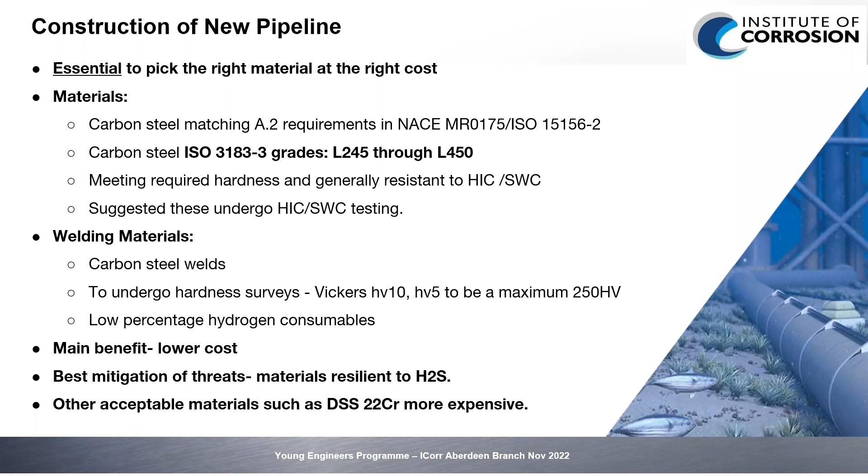On the CUI, you talked about, I think it was 23% of the systems where you didn't know if you had any insulation at all. And then you gave a very detailed 12-year look ahead on inspection, planning, and resources. But I guess you've got a lot of unknowns at the start. So how are you going to adjust that plan with what you don't know yet, and then risk assess what's going to have to shift?

So the first step is fully understanding the CUI, the full extent of the CUI risk. Once we carry out that campaign, which will have a one-off cost, it will have to change. The RBI will be viewed as an iterative process, and then it will get factored in. If there are immediate threats that we find from that one-off campaign, they will have to be managed on a case-by-case basis, whether going through an anomaly system or if they can wait until a stripping campaign can potentially mitigate the long-term issues it may find.

Okay, thank you. And a follow-up: lots of detailed costings on resource, equipment, and planning. But what's your view on, since you talked about deploying lots of barriers at the start, how does barrier deployment and barrier effectiveness have an impact on your long-term inspection plans?

Thank you for the question. I believe the most important thing is to really understand what is the actual condition at the moment. The data given to us, we may need further detail on that. I want to reference a statement from UK HSE, one of the good practice documents, about aging assets. How does UK HSE define an aging asset? It's not about how old the system is, but about how much you know about your system, its condition, and how it changes over time. So we need to first know what the conditions are, and that helps us.

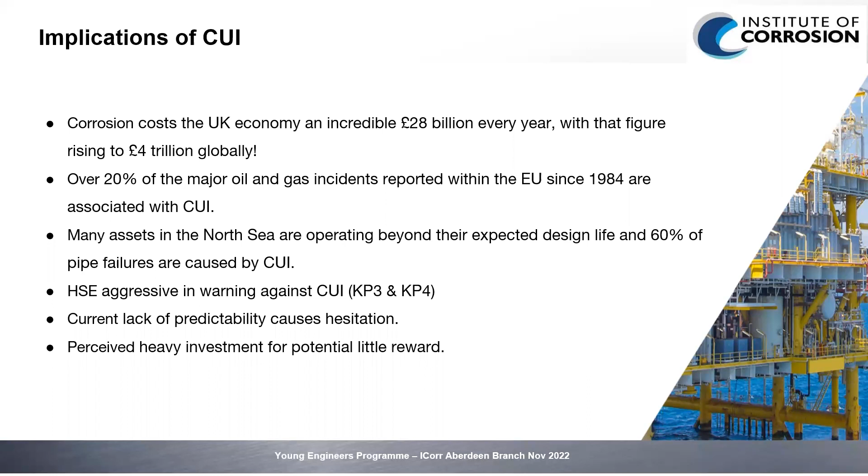To answer that: it's clear from the data we've received and what we have found that the previous ownership and stewardship of this asset has not been up to standard. It's not been acceptable, and part of our job with your client is helping them regain confidence in the asset. Particularly that first year of inspection is significant, and that 12-year plan will definitely change based on what we find. But we feel that the knowledge and skill we have in our team put us in the best position to do that for your client and help them achieve their goals.

Is it exposed quite heavily to the marine atmosphere? Is it under deluge systems? Is it inside, and is there proper ventilation? Or is it in a situation where moisture can build up around the insulation? Those points I feel are all valid and all critical. However, there may be other ones when we start the campaign that we realize there are a couple of extra data points we need to gather.

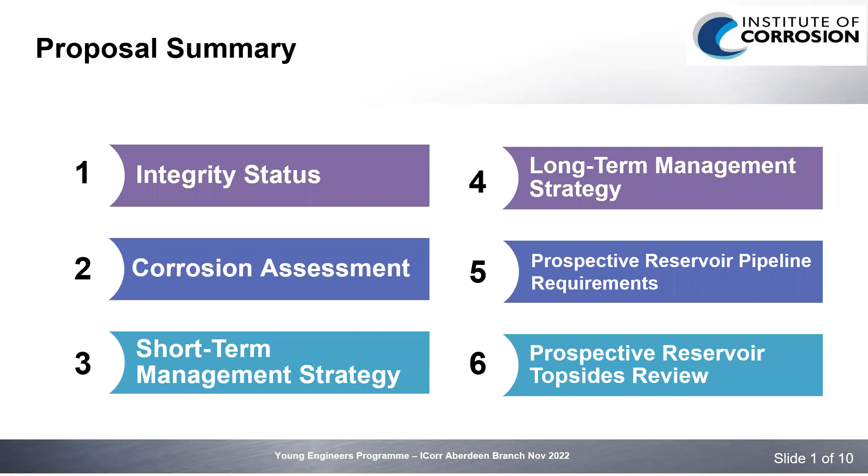Now onto the coalescer, just downstream of the third stage separator. Corrosion was identified internally within that vessel in 2015. A coating was applied; however, because there was only 1 millimetre left of corrosion allowance and it was suspected to be corroding at a rate of 0.2 millimetres per year, it's recommended that we do some ultrasonic testing to identify the wall thickness within that vessel and whether we believe that coating is actually providing sufficient protection.

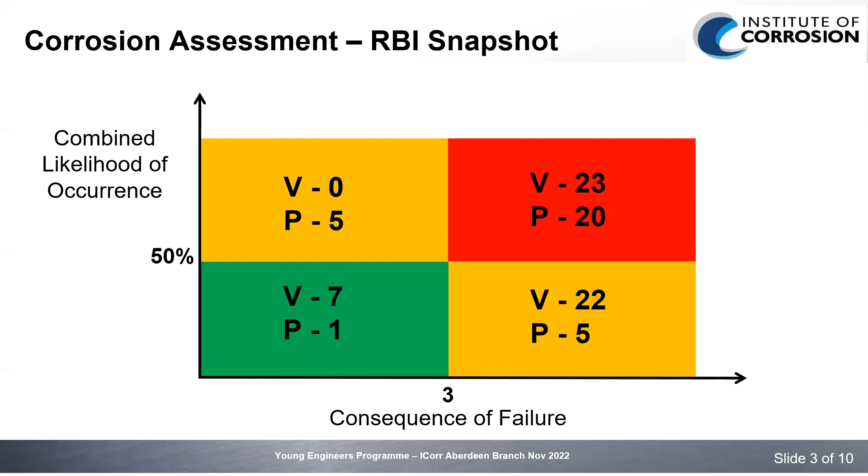Right. So what I've been looking into is the RBIs, and I've got a few example threats for you. They cover different mechanisms that you're likely to see throughout the platform. So first of all, we've got the first stage separator. We've noticed that there was pitting, one large pit recorded at the bottom of the separator, and what we've put it down to is sand at the bottom because the sand removal is lacking.

They're removing about 8 to 10 tons of sand at each shutdown. So the inhibitor that is in there is unlikely to work. And also there is no current biociding of the first stage separator. The next one will be the glycol storage tank. It's not a hot storage tank, however, it is uncoated carbon steel and it's subject to deluge, I believe once every 12 months. And we don't have the plot plans of the platform either. So it could potentially be in a splash zone or just open to the elements in general.

We've then got the produced water offtakes from the separators. These have been replaced with duplex, as there was recorded CO2 corrosion, and also the nozzles were corroding due to sand erosion. But the one thing that they haven't accounted for is they've not removed the carbon steel valves, and there's also been no isolation kits noted to be fitted. So we'd like to fit some isolation kits just so that the carbon steel valves aren't quite at high risk.

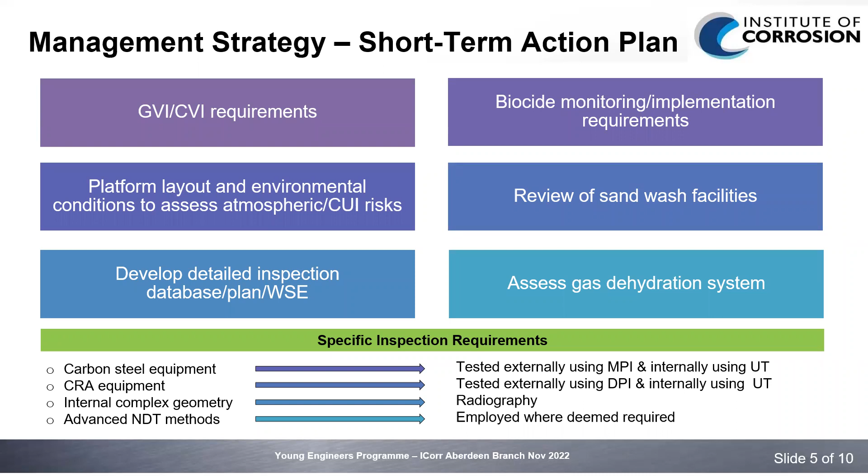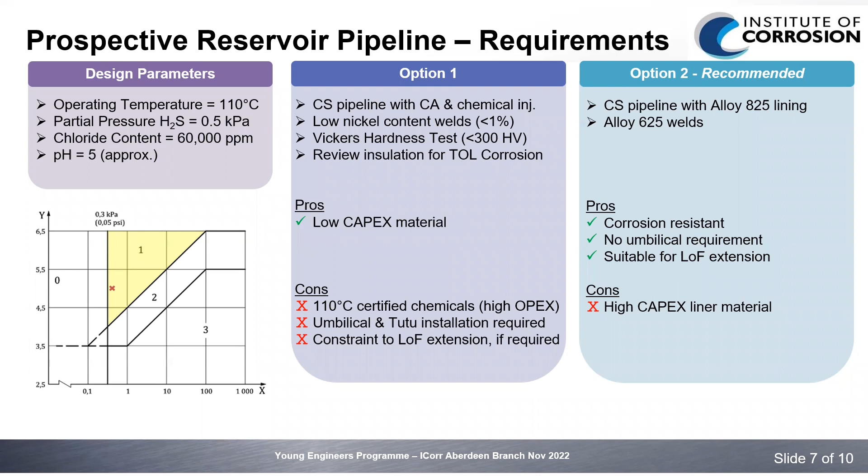So the welding requirement. Based on carbon steel, before we lay down onto the new field, what we need to do is based on the low nickel welding, which is ideal for the sour service upgrade, which is fast, reliable, and semi-automatic. So that's before we lay down the foundation. Then we do the testing. On the impact testing, there needs to be 6 millimeters wall thickness. Hardness testing, the HV10 Vickers hardness test on the weld. Corrosion testing, minimum 24 hours, 40 degrees.

And then we do the TOFD, time of flight diffraction, to have a good survey in place and good corrosion management in place. Then we review and implement the WQR certification, so we could track and trace on the weld, and then review and monitor the pipeline on weld observation.

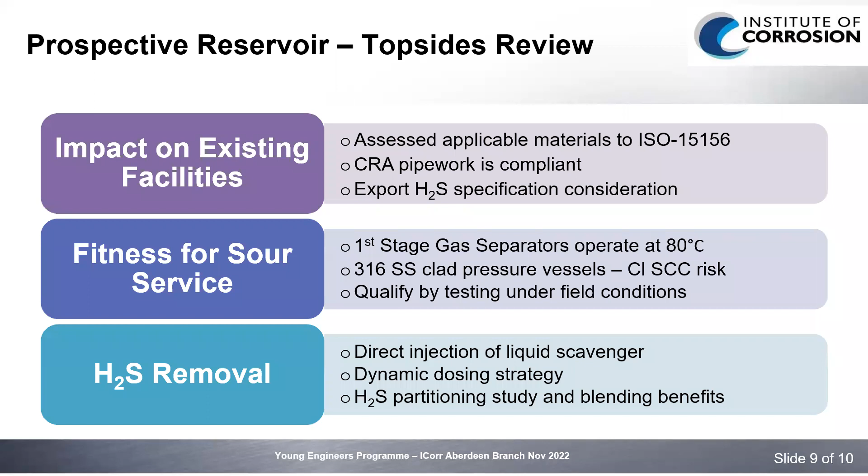And lastly, we would recommend that a full H2S partitioning study is done for the whole system to take account of current production from field Y and also associated gas from multi-phase production. I'll now hand you back to Mustak, who will round off the proposal. Cheers.

So our closing recommendation. So all of those things you could buy for the platform. Well, if you hire us, we are ready to go in, do the GVI, CVI campaign, the biocide injection review, RBI implementation, with which we could improve and maintain the corrosion management based on the recommendation. Our proposal for the alloy 825 pipeline, if we decide to go with our suggested recommendation pipeline, which is ideal, and upgrade for the H2S scavenger for the better process.